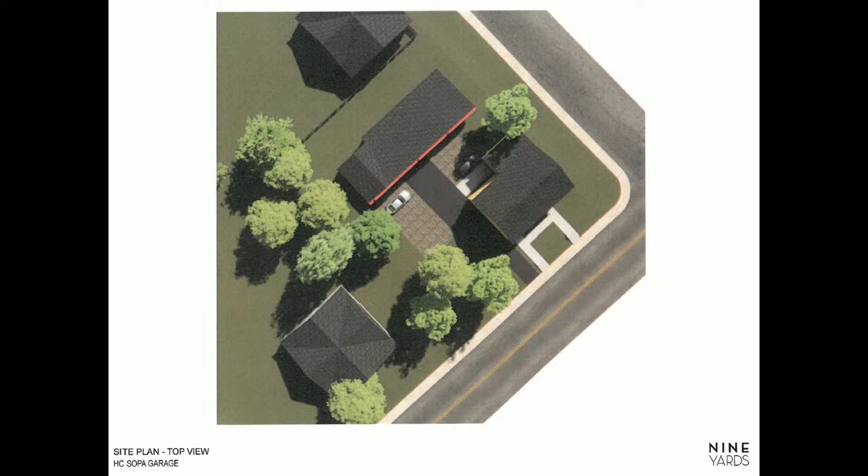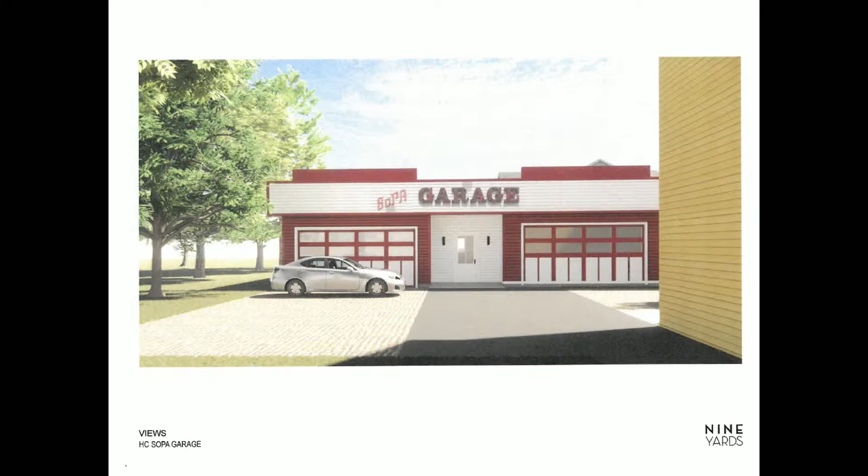Thank you, Madam Chair, and I'm here to answer any questions if they arise. Thank you. Any questions, folks? Okay, well if we have no questions, I guess we can—this doesn't go to council, so what do we do?

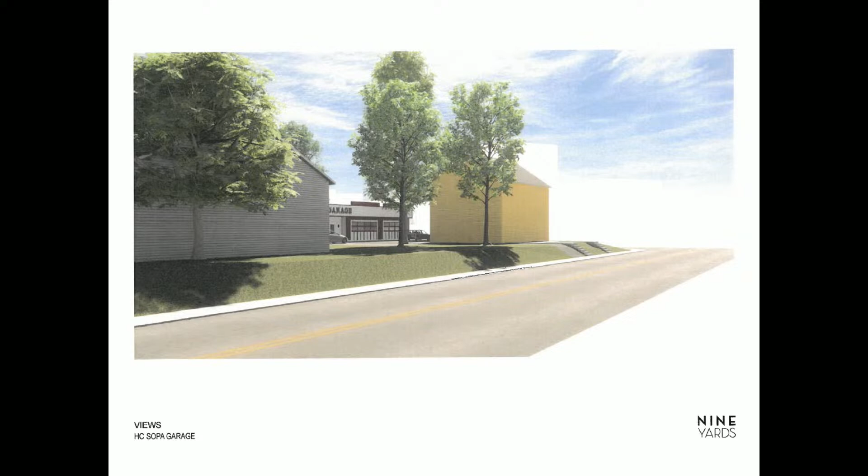So this is an application for a three-story addition to the back of the Holland College Wellness Center at 275 Kent Street, as per the design reviewer's report. As background, the proposed three-story addition is for the Wellness Center. The project is designed to enlarge and improve the physical space available to Holland College for accommodation and operation of administrative functions, health practitioners, and student counseling at 275 Kent Street. Again, they're looking to have their design approved.

Of course, this is in the 500 lot area. It exceeds the size of the addition that you can build without approval from this board, and it will be reviewed in the context that it is a product of its own time and complements and is compatible with the existing buildings and neighborhood.

This application was reviewed by Mr. Fellows, and he's gone through it in detail. Mr. Fellows has a lot of positive comments about it, which are in your report.

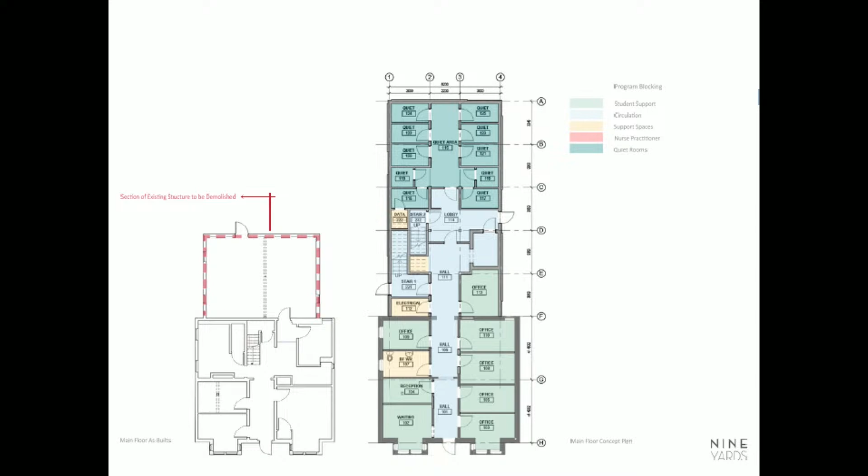I'll highlight a few. He indicates that in his opinion, the substantial proposal does not compromise the appearance or negatively impact the heritage look of 275 Kent Street. The addition is really only visible from the rear properties on Fitzroy, Weymouth, and Cumberland. Together with mature trees, we think the large addition will have little to no impact on the neighbors.

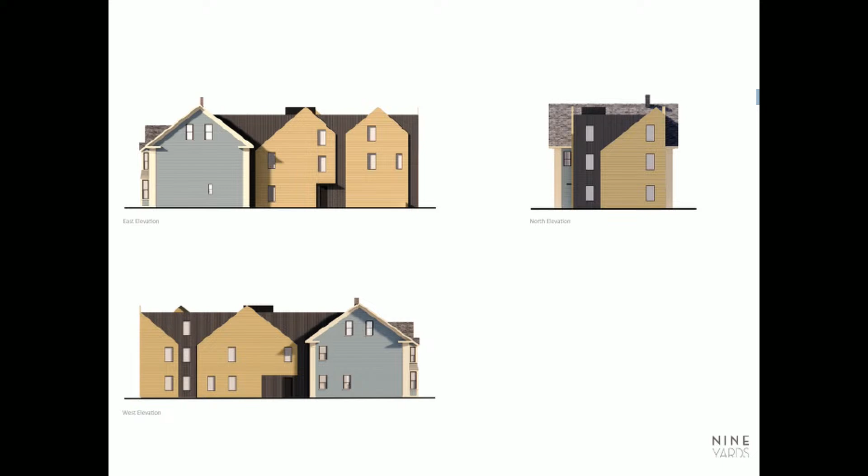He also indicates the parcel in question has an added advantage of being close to both neighbors, about 7 feet on one side and 2 feet on the other. Therefore, any addition to the rear of the structure will be virtually unseen from the sidewalk on Kent. In other words, the existing heritage facade will remain uncompromised, and the proposed addition, and thus the streetscape, will remain intact.

He also puts in the caveat that normally, as an architect, he would avoid using pastiche elements on any wall. But in this case, the designers have used the traditional shapes as raised elements very effectively. The forms recall typical roof lines of the 500 lot area, and by using horizontal metal cladding rather than the darker vertical metal of the base shape, an interesting look is achieved for an otherwise bland box.

He has a number of other comments that he goes into in detail, but I think that is the key message we're receiving from him. He feels that the massing is screened, that the building material at the back is a product of its own time, and that the rhythm of the windows was done reasonably well given that it's an addition to a heritage property.

The design reviewer was also advised that this project is related to a designated heritage property, and that it had been to the Heritage Board. They had reviewed it and had some comments and concerns forwarded along to him. He took all of those into account before he made his decision. Overall, he felt that the project as proposed met the key components and guiding principles of the 500 lot area standards, and was prepared to support the application.

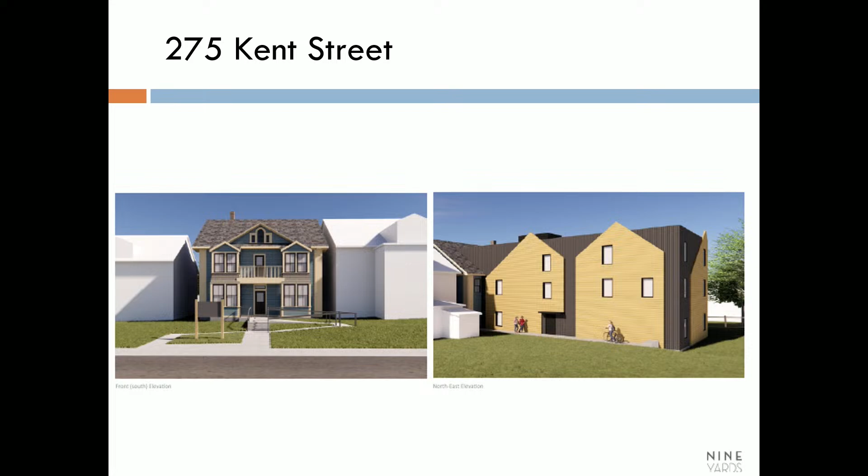Maybe just to add on to that, Justin Dunn, Director of Facilities Management for Holland College. As the client of 9 Yards, we looked at our own situation. Number one, we're very proud to be in the 500 lot area of the city of Charlottetown. We're very proud of that. And we're also very cognizant of the fact that...

We operate with the rich heritage of Charlottetown and of the buildings in which we operate, including 275 Kent Street. I always think about programs such as the Heritage Retrofit Carpentry Program and things of that nature. So it's really important for us to try to walk the talk. And the spirit of what we try to do is the sympathetic restoration of our heritage properties, but we do look to improve them to today's standards where possible too.

I think this is a good example of blending those two together after a lot of careful consideration and the application of the building. Okay, thanks. Thank you. Anybody else?

Yeah, if I could. Larry, I guess I was probably the one during the Heritage meeting that had some difficulty with this project. I think, mostly, you've got a design reviewer who doesn't take exception to the pastiche, the kind of facades put on the side of the building.

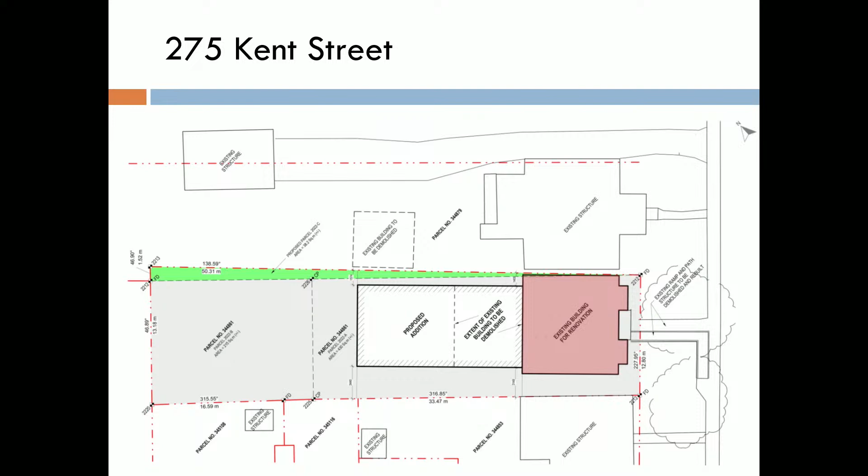I'm wondering, is it behind Old Griff's Diner? It's just up from Griff's, a little bit west of Griff's. And behind Griff's is where there's an apartment building, and I think some other smaller buildings there, kind of a complex little mix in behind. But I think that's the one I was wondering about. You can kind of see where there's a building directly behind the subject property, and that's actually a garage with multiple parking stalls in it.

And I think, I'm not sure if it's that house or the next one, is Bedford McDonald House. I think it's the next one over. So you really, I don't think you'll be able to see the building at all from Fitzroy Street.

Is it a pitch roof? No, it's a flat roof. Would you ever consider putting a terrace up there, or a seating spot? I would be surprised, because the trouble with a terrace is you then have to do things like guardrails, stairs to it, and exits out of it. It's very complex, and I would be surprised there would be enough space—it's not a very big space. I must add, we have some mechanical equipment up there too, so there wouldn't be a lot of usable space on a terrace.

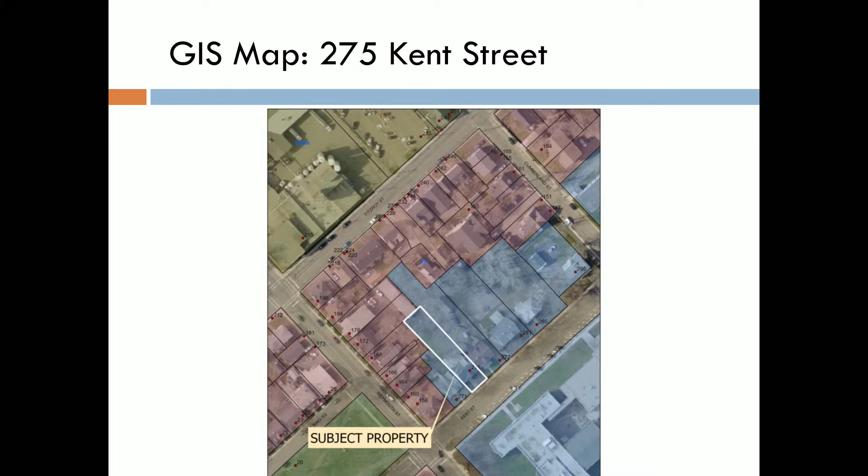Okay, thank you. Thank you for that. Now, is there anybody, Chris, anything you want to add? I know you're on the phone. Yeah, no, I've been going through everything here, and I'm totally good here right now. Thank you. Okay. Anything else before we...

Decide what we're doing, I'll put a motion on the floor if you approve. A motion on the floor, seconded by Councillor Back, that we support the recommendation of the design reviewer and send it back to staff. All those in favor? In favor. Great, okay. And anybody opposed? Julie has stepped out of the room for a minute, so I think we consider that in favor.

That's Robert's Rules of Order, so, yep. Okay, that concludes our agenda, unless there's any new business.